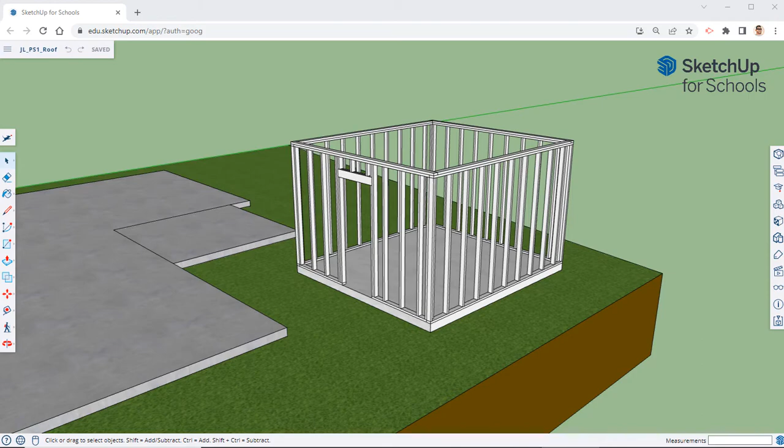Welcome back to our framing of our Plan Set 1 project. We used that starting project, the first two videos where we created the foundation and the plot, and we hid everything else, and we're reconstructing the shed just like we would be framing it outside. So far we have put in our front door, we put up all of our generic walls, and now in this episode we're going to put in our window there in the back.

It's a large 4 foot by 5 foot window. So I'm simply going to take my tape measure and start marking out those measurements. So find our center point, which is our 6 feet, as our overall width is 12 feet. So that is the center of our window. Our window is 4 feet wide, so we're going to go 2 feet to each side.

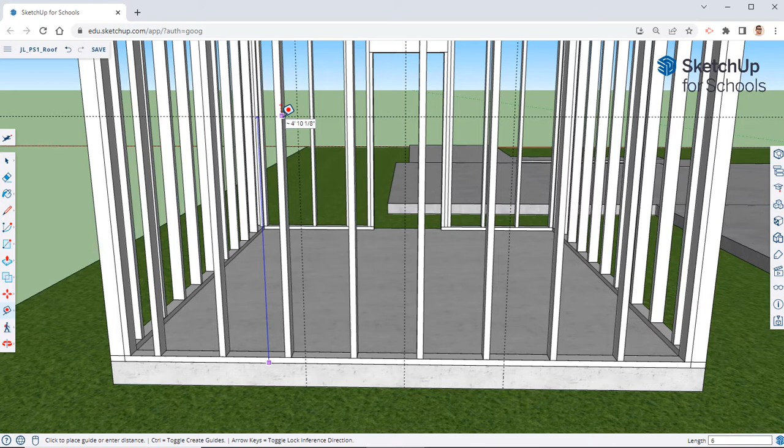When you're putting in the top and bottoms of windows, you're just given a 4 foot by 5 foot window. Always, or almost always, your window is going to go up to 6 foot 8. There are other situations where they might not, but in general, that is going to be a starting point, unless you have huge 10 foot walls or anything like that.

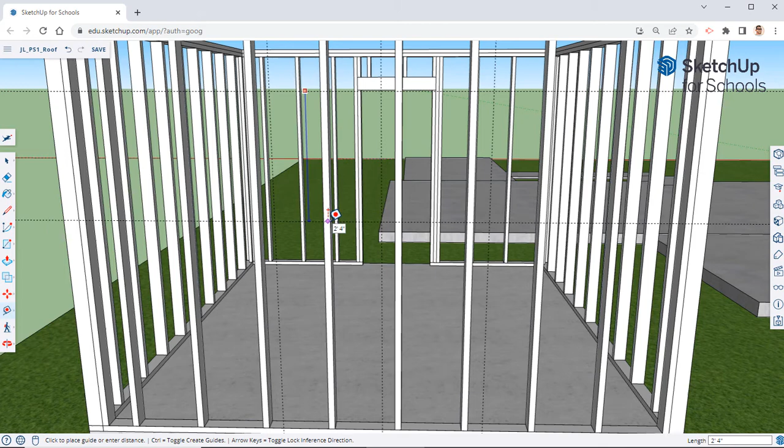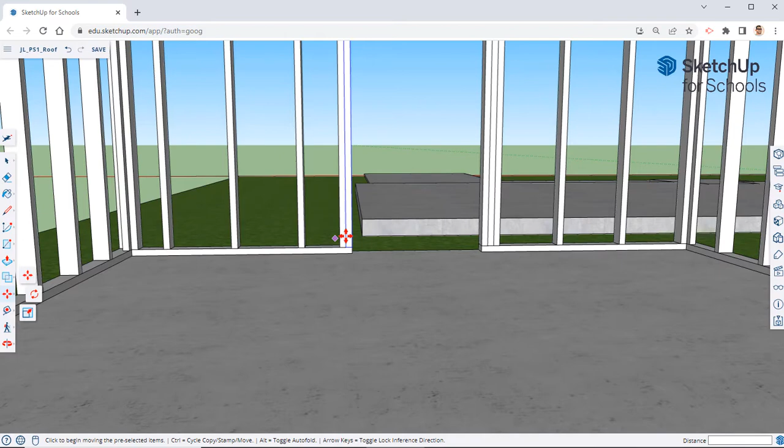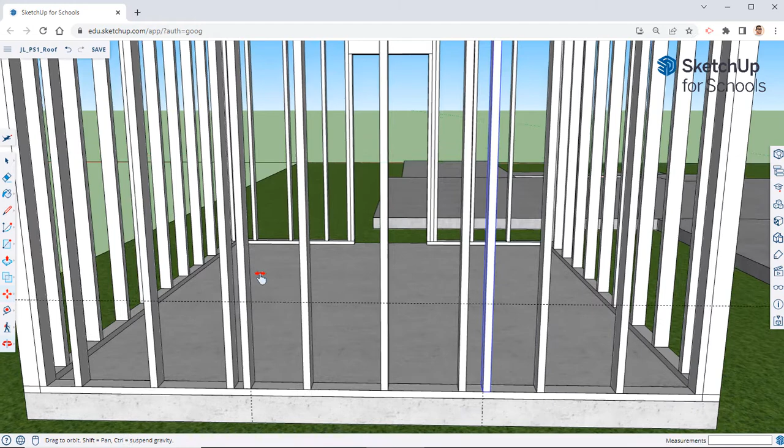So that is our starting point, and then we'll come in here and we'll go down from that 6 foot 8 mark 5 feet, and that is our window. So I'm going to go ahead and delete this center line, and there is our window. So just like before, I'm actually going to take this header over here, grab it from that corner, hit Control, and we'll bring it over and place it right there. I'm then going to grab this corner, hit Control with the Move tool, and bring it over here to place it on the right side of that line. These are our jack studs, and our header is going to go across there.

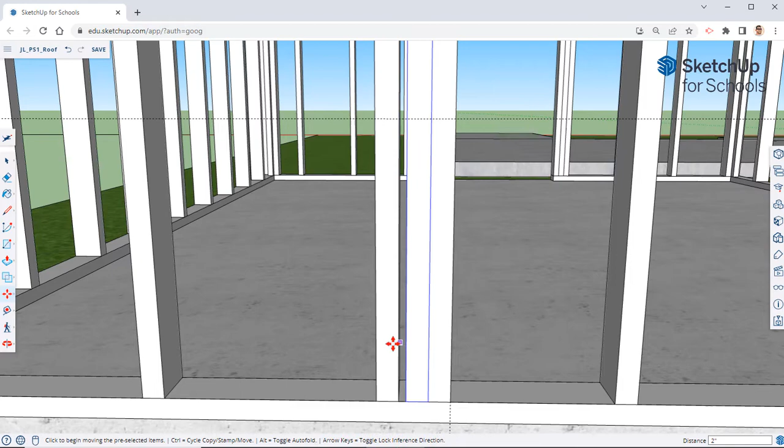Use your selection bar or your space bar in order to bring up your selection tool. Bring up the Move tool again, and we're going to copy this and move this over there for our king stud. Yes, we have a little gap there, but we can't simply move this one because then this space will be wider than 16 inches. Over here, we're going to do the very same thing. And there is our king stud for that.

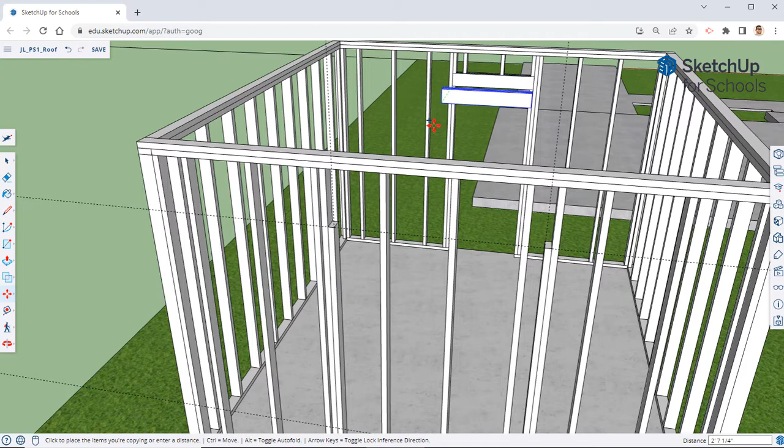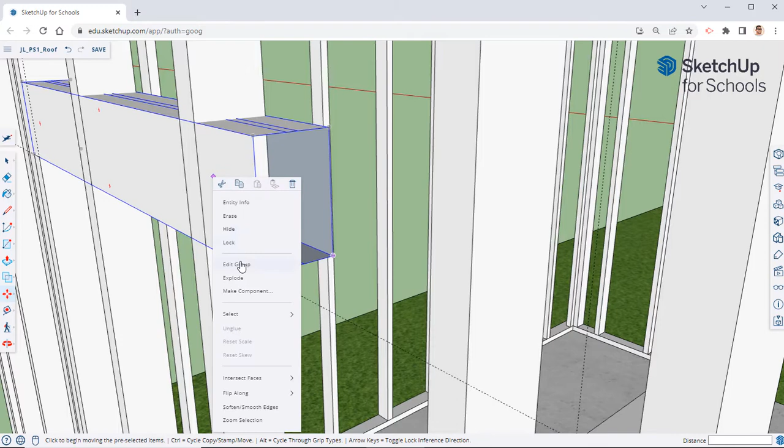We can take our header, hit Control, bring that over here. Make sure that it is a group. If it's a component, make sure that you click on Make Unique, which should be around here, because we don't want for this to change this. So I'm going to edit group, close this in, and I'm going to bring this over here. Hover over that line to inference that, and there is our header.

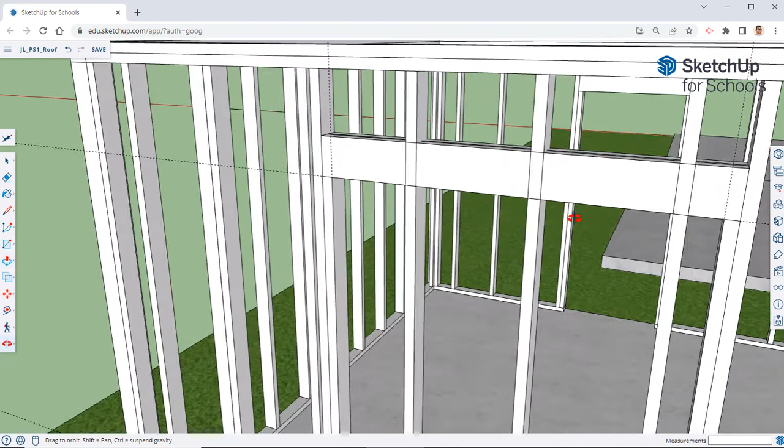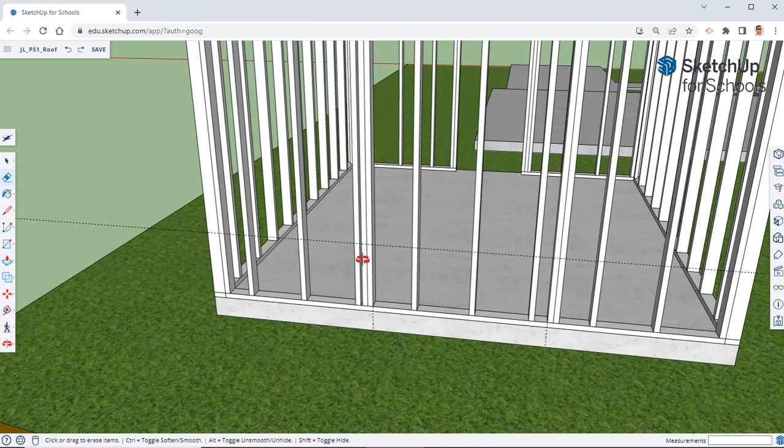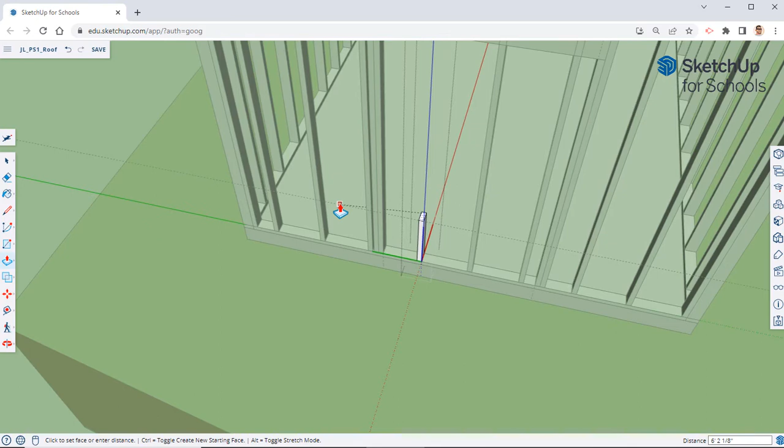At this point, I can get rid of these guides. I don't need them anymore. This is where our cripple studs at the very bottom are going to be. And actually, I do need that bottom mark right there. So we're going to take this one. We're going to make it unique. We're going to edit component. We're going to push pull. Should be able to hover over the top of it. We're going to bring that down, hover over that bottom guide, and then from that bottom guide, we're going to bring this down another 1.5 inches.

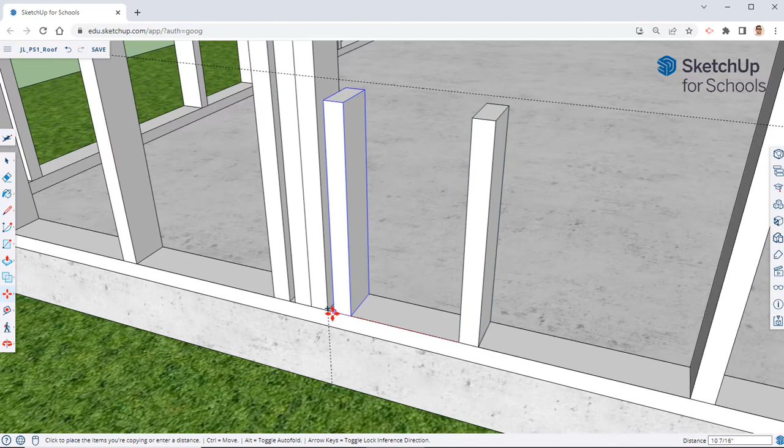Here, we're going to take this one. We're going to make a copy and put it here. We're going to put a copy right here. And then we're going to put a copy where the other studs are. Once those are there, I can delete that one and I can delete that one.

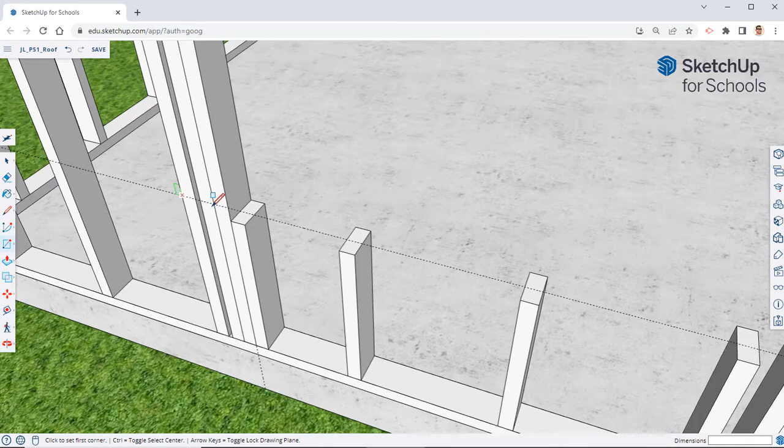Now we got to put our window sill in. So we're going to put that right there and bring this up 1.5. So that's why we brought those down another 1.5 inches.

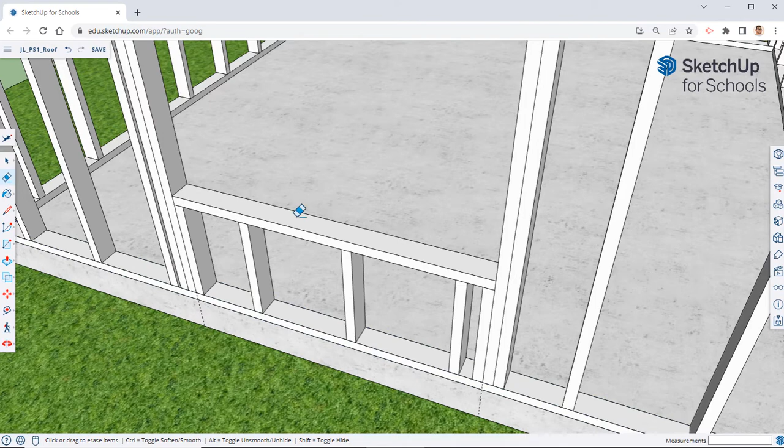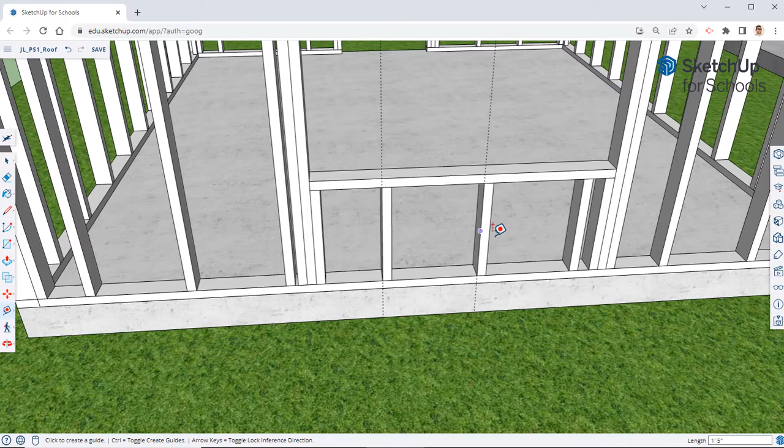I'm going to triple click on that, and I'm simply going to make it a group because we only have one. Again, if this was a larger house or anything like that, then we could turn all of this into a component and reuse this, especially if it was like a regular window where we had multiple of them throughout the house. We could simply just take all of that and place it in there. Here I forgot the very top, so I'm going to mark really quick those places.

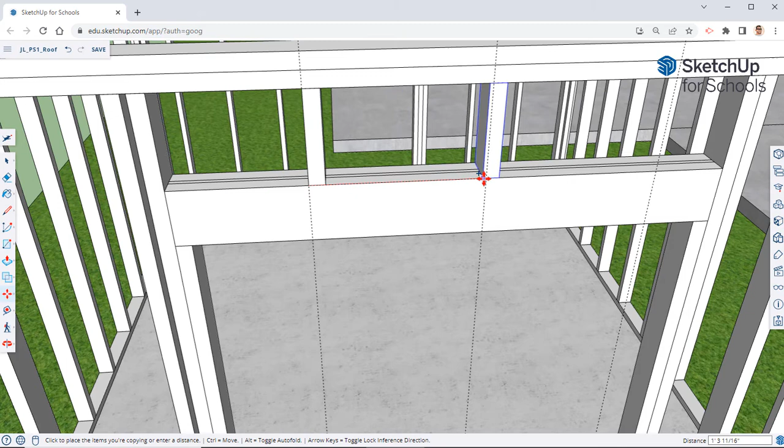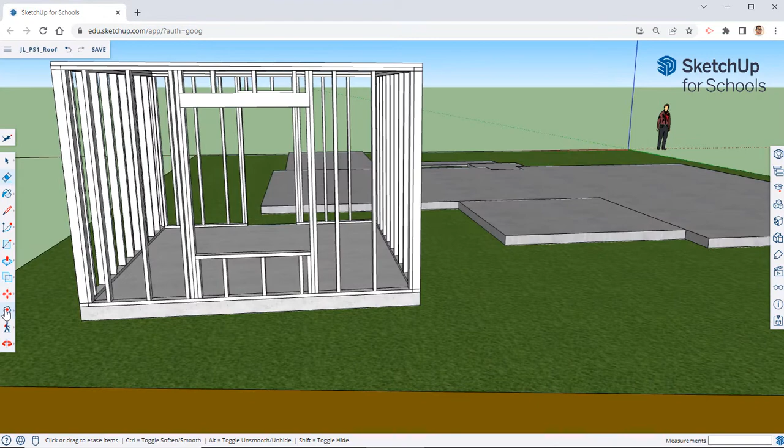I'm going to reuse our components over here. So take one of those and place it wherever you had marked your studs, wherever that might be. Just like the bottom in our door, we do need a stud on each end. And there is our 4-foot by 5-foot window.

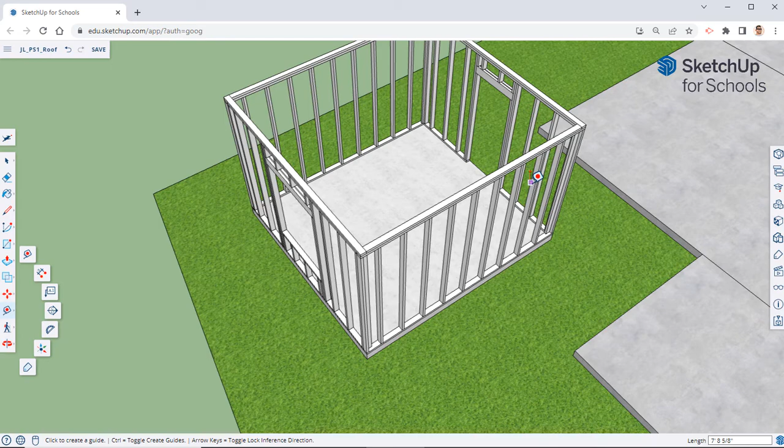The only modification to walls that we have left is we need to place in our little closet, which is going to cause us to have to change this front wall and this side wall. If we take our tape measure, the center of the wall is 3 feet from the front edge. So I'm going to take my tape measure, go from the very front and go 3 feet, and that is going to be our center line.

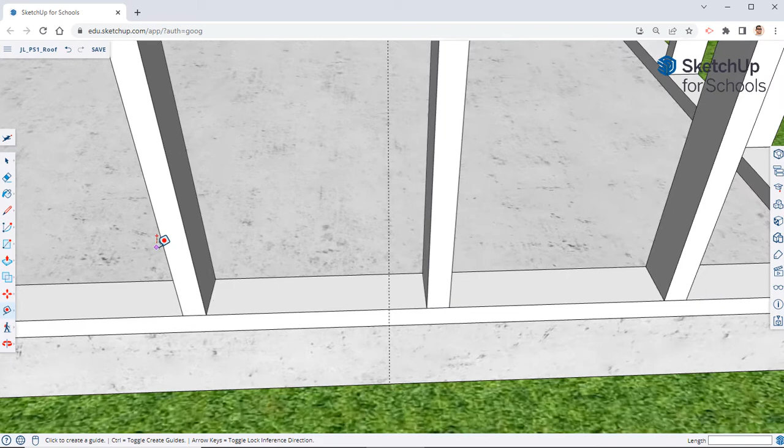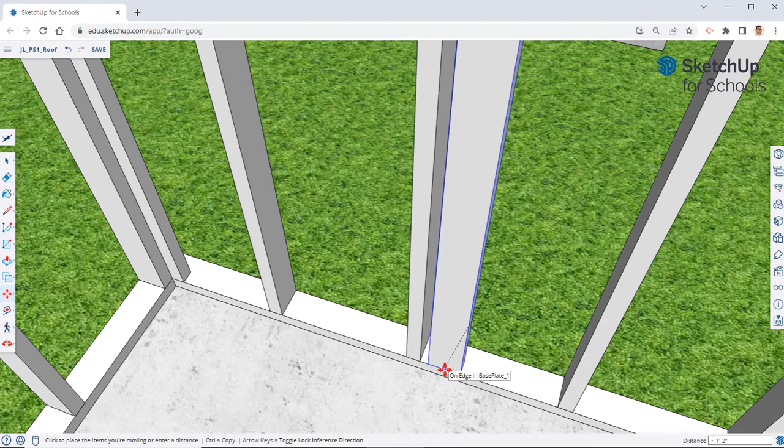I want to take one of our studs, hit Control, and we're going to bring this out a little bit. We're then going to rotate this one. I want to find the midpoint. And place it there. Well, here actually we'll find the midpoint there, hover it right there, and then we can simply just bring this along that green axis or that red axis to the front.

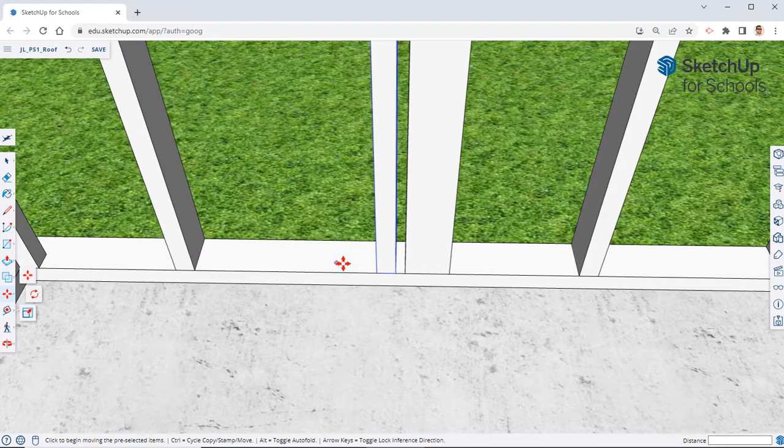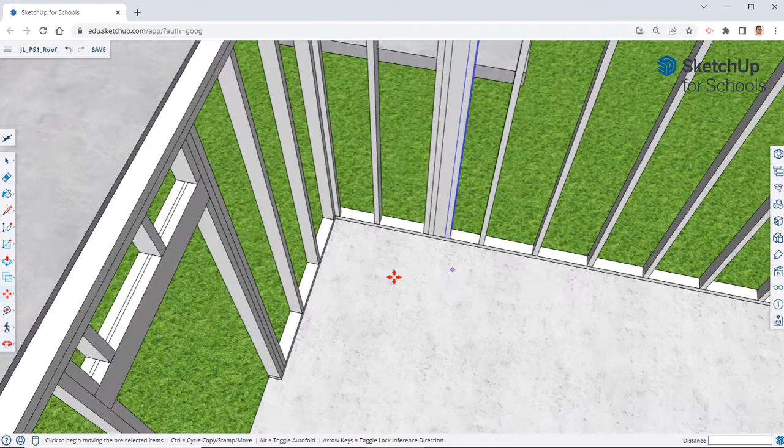We do need to sandwich this board on each side. So because there's not enough space for a 2x4 there, I'm going to bring this over here and then make a copy of this one and put it beside it. We'll then make a copy of this one and place that right there. Take my tape measure and we'll put in a guide right there and a guide right there, simply to help me draw our base plate.

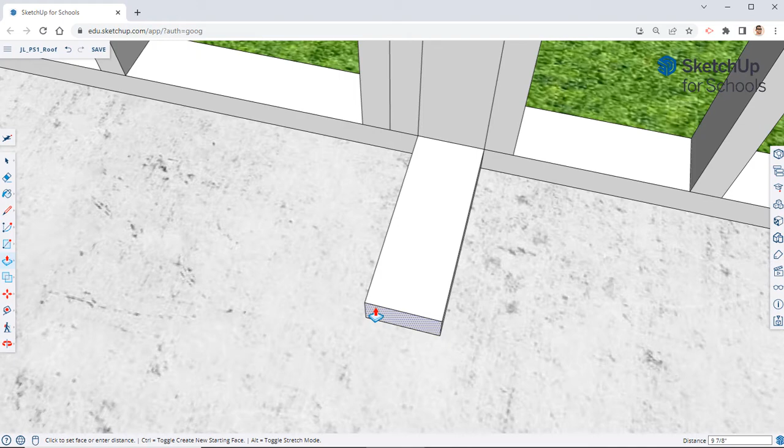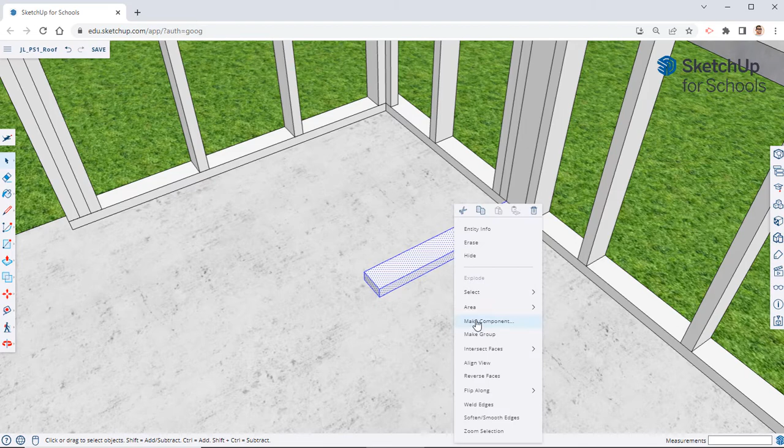So this is going to go out 2 feet. And we know that it's not in the blueprint, but we do know that our countertops are all 2 feet deep. And so our closet is flush with those countertops. So that is going to be that base plate. So let's go ahead and make that a component, as we will use that for the bottom and the top plates.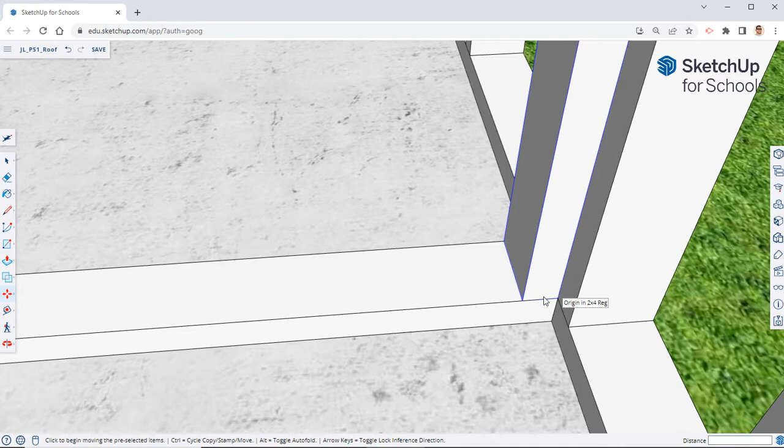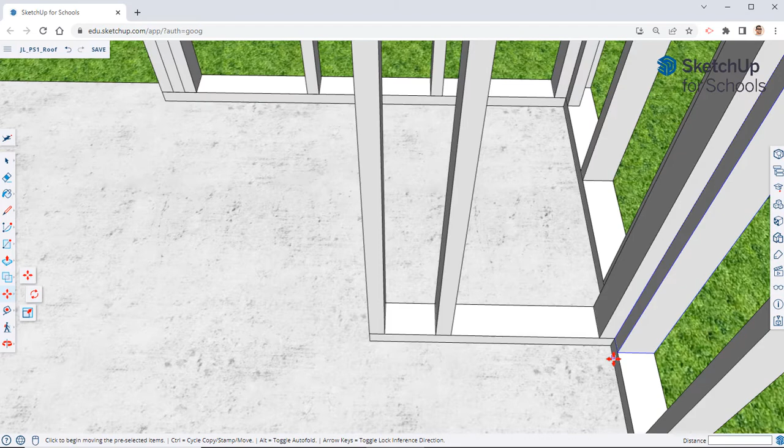To fix up this part of the wall, simply make a copy of that component, bring it over, make a copy again. We're going to move it 16 inches, and that's it. We don't need to do any more with it. Let's make a copy of another one and place it right there. And I want to take one of these and move it over here to this other side, because again, this is a corner.

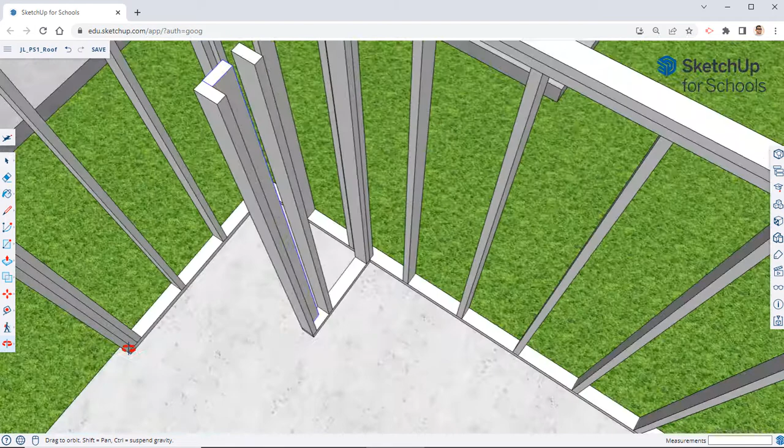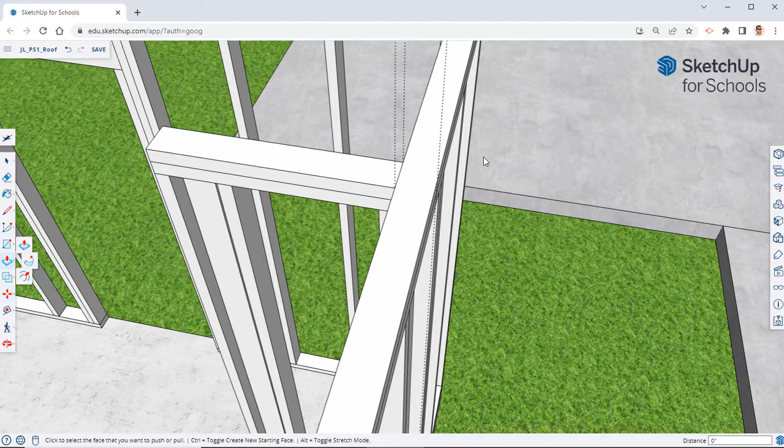Select this top plate, make a copy, and we'll place that there. Let's go ahead and make another copy of this one, bring it up. I do want to make this one unique, and we're going to go ahead and create two guides going across there. I need to make that one unique.

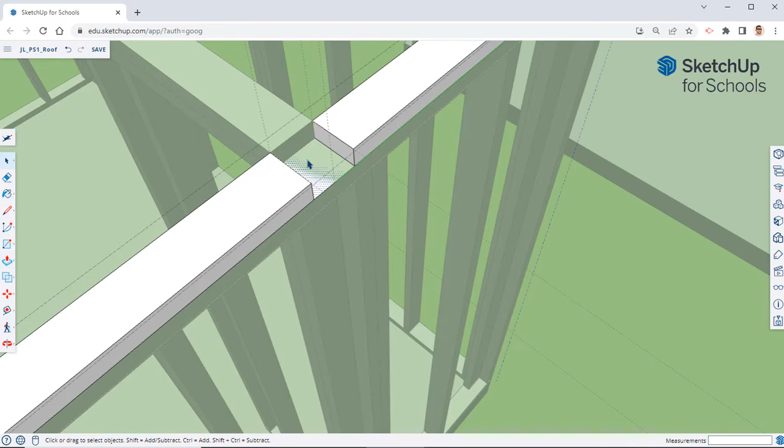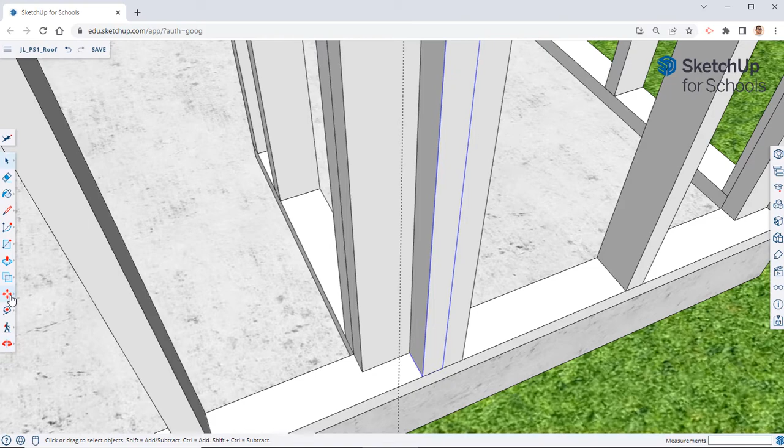We're going to right click, edit component. We need to cut that little section out. Bring that down, we'll go ahead and delete that. Go into this component and bring that out this way. This is a similar setup to our corners where we overlap all of our stuff to help bring all of those walls in. And I forgot, didn't make a copy of that. There we go. So that is that part of the wall.

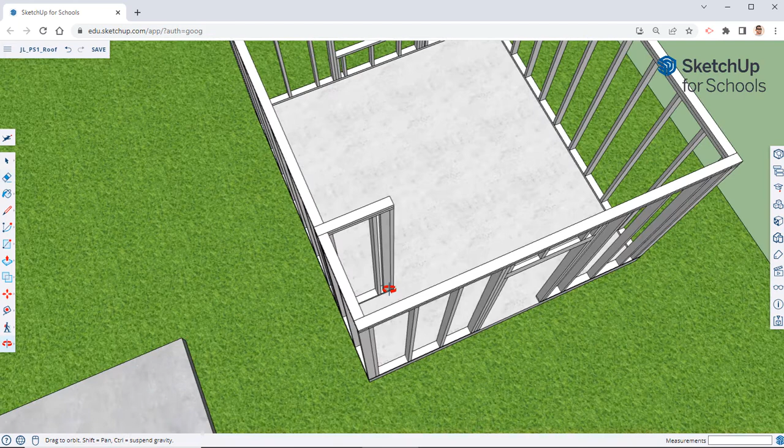In our next episode, we will finish up that front part. It's this very, very small door, so I'm going to go off of what the blueprint says, and we'll get that working. We'll do the very same thing we did here, over here on this wall, where our door's going to be, and then we'll start putting in our roof.